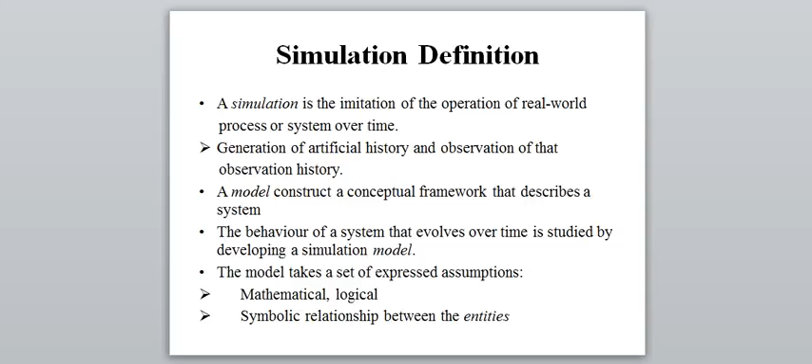Next is the goal of modeling and simulation. So what is the goal of modeling or simulation? A model can be used to investigate a wide variety of what-if questions about the real-world system. Potential changes to the system can be simulated, their impact on the system predicted, and adequate parameters found

before implementation. So, simulation can be used as an analysis tool for predicting the effect of changes and a design tool to predict the performance of a new system. So it is better to do simulation before implementation.

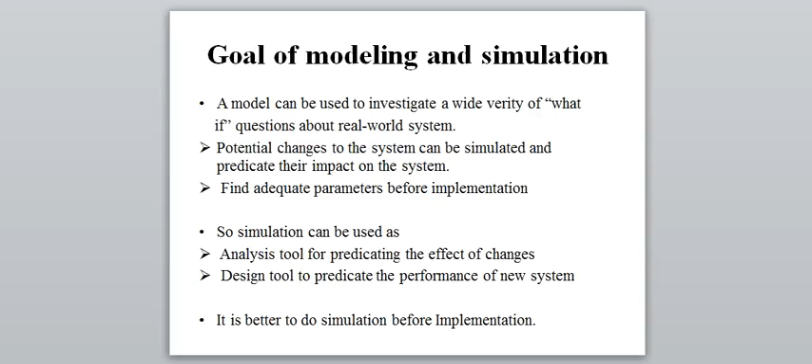Next one is how a model can be developed. First of all, we see the mathematical model, which contains probability theory and algebraic methods, and with the help of these theories we are getting accurate results. They have a few parameters. It is impossible for complex systems by using the mathematical model. So we have to use

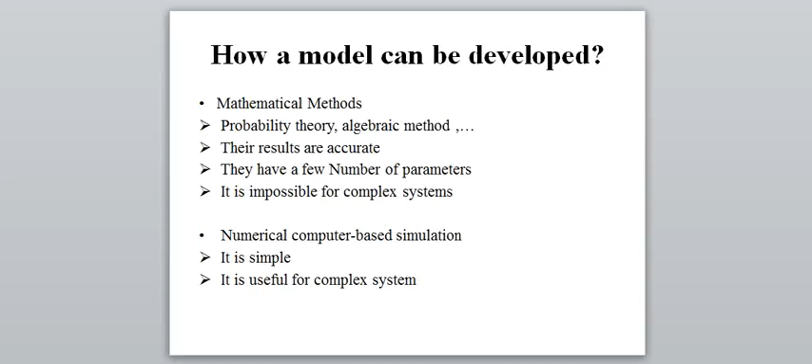another method. So another method is numerical computer-based simulation. It is a simple method for simulation and it is used for complex systems. A complex system we can simulate with the help of numerical computer-based simulation.

Next point is the advantages of simulation, meaning what is the importance of simulation? New policies, operating procedures, and information flows can be explored without disturbing ongoing operation of the real system. Then new hardware designs, physical layouts, and transportation systems can be tested without committing resources for their acquisition.

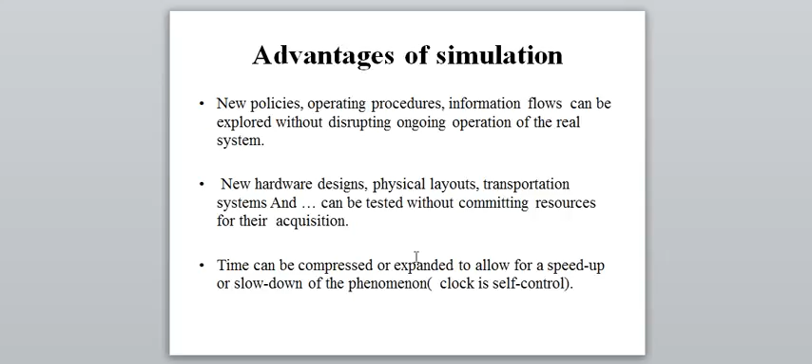Time can be compressed or expanded to allow for speed up or slow down of the phenomena, meaning the clock is self-controlled in the simulation. Next, insight can be obtained about interaction of variables and importance of variables to the performance. If we require different variables or the relation between different variables, it is shown with the help of simulation.

Bottleneck analysis can be performed to discover where work in process in the system is delayed, and a simulation study can help in understanding how the system operates.

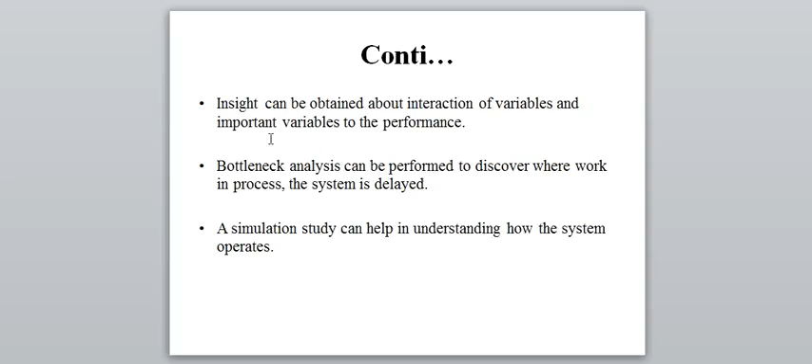Then next are our important points, the limitations of simulation. What are the limitations of simulation? Model building requires special training. Vendors of simulation software have been actively developing packages that contain models that only need inputs.

Next, simulation results can be difficult to interpret. Next one is simulation modeling and analysis can be time consuming and expensive. Many simulation software packages have output analysis.

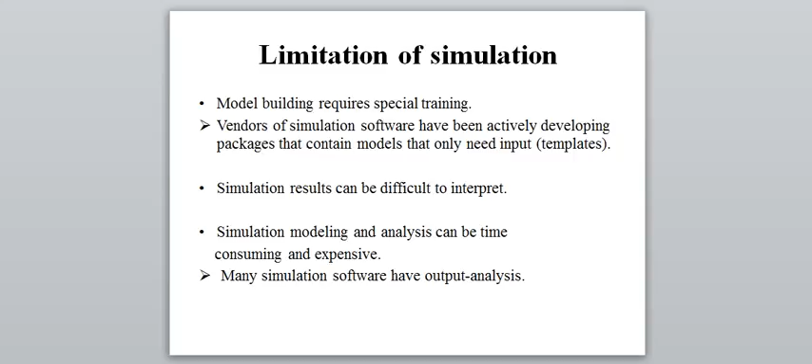Now we are discussing the simulation limitations of RTL. The same RTL code can be interpreted in multiple ways by a simulator. So, if your code is written in a manner that can give multiple results, your simulator will pick any one of those interpretations. Your simulation might pass with that interpretation, while the actual functionality realized could be different. This is an important limitation of RTL code.

The next one of RTL simulation is that simulation-based verification effectiveness is limited to the quality of vectors and quality of monitors being applied. Then, with the design being so huge and with many storage elements, it is simply impossible to exercise the design for all possible situations.

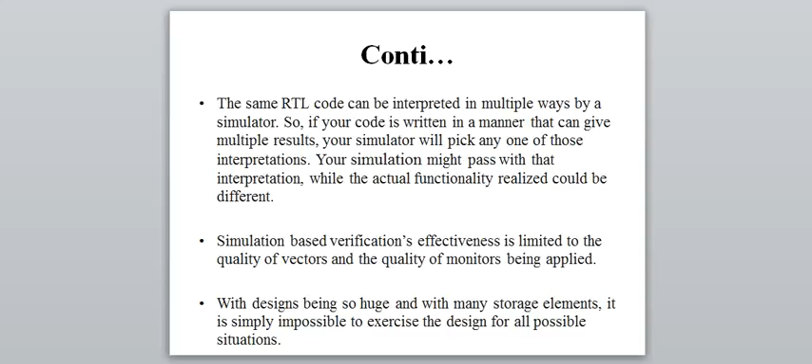Then, vectors decide how the various parts of the circuit are being exercised. So, if a faulty portion of the circuit is not even being exercised, simulation will not be able to catch the fault.

Next, simulators have no concept of timing. They are not self-reliant at timing-based verification. At the RTL level, most designs don't have timing. Even if there is some timing mentioned, it is not necessary that the same timing would be realized after the design is synthesized. So RTL simulation does not give any sense of timing.

Next one is, besides functionality, there are a lot of other aspects like test, power, routing, congestion, etc., which are important for the design, but simulation does not do anything to validate any of these aspects of the design, though with the advent of some new formats like CPF or UPF to specify power-related intent, simulators can now do some validation of power aspects.

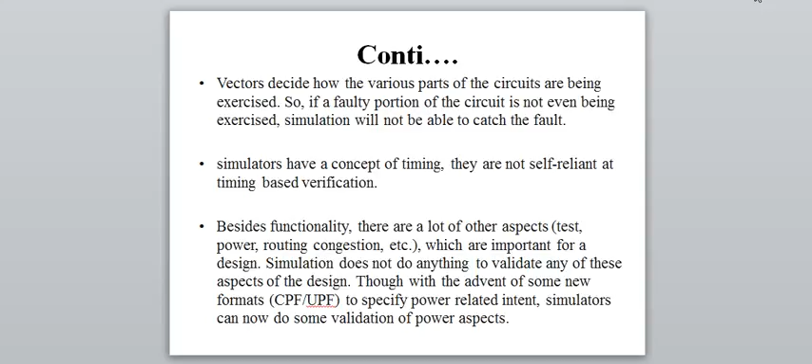Because of all these limitations, it's now standard practice to use static rule checkers as part of the verification flow. These tools will verify many aspects of the design without the need for accurate vectors. These static checkers could be assertion-based formal tools or rule-based checkers. Thank you. That's it.